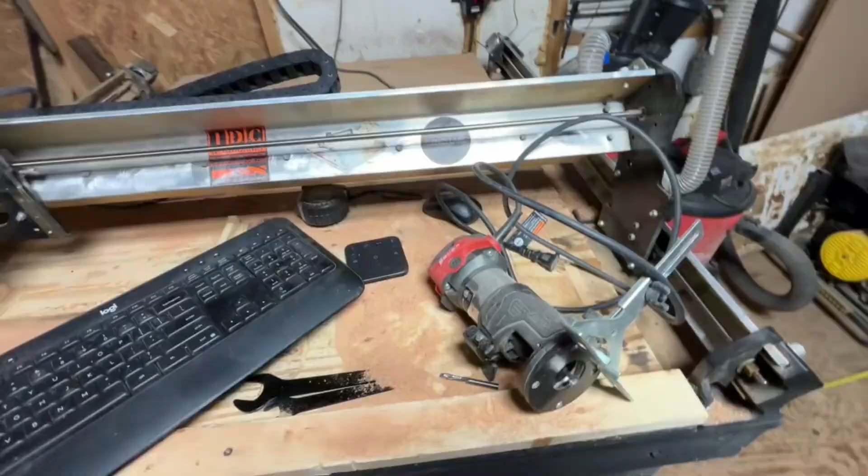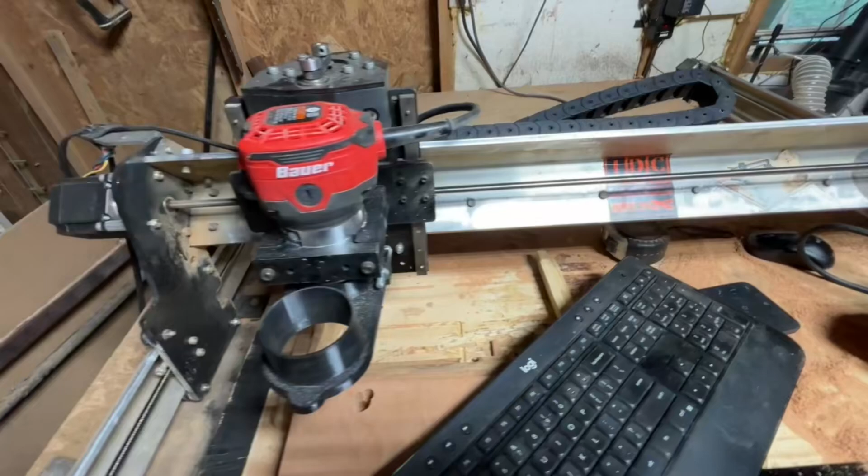Well, we got a mess in the workshop today, but somebody had a question about how to use a keyhole slot in MillMage. I just have this jig set up for mine. I always keep an extra palm router because you never know when one might burn up, but I keep this one on a jig just for keyhole slots. We'll take a look at this, and we'll see how to set this up in MillMage.

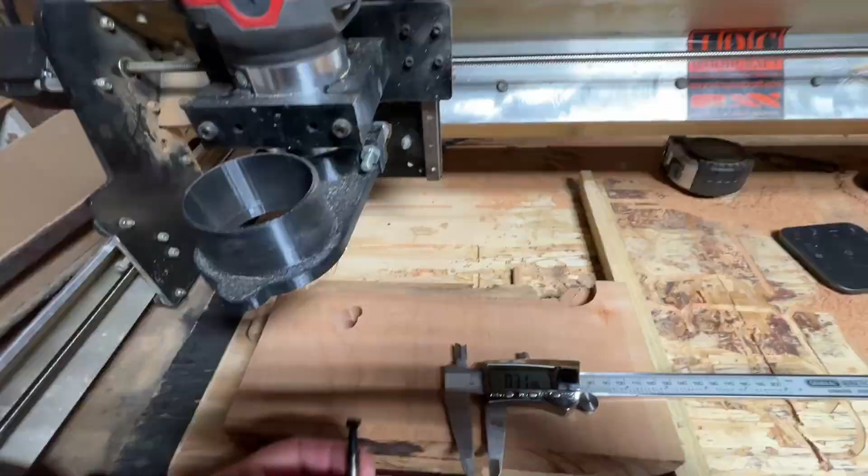Okay, first things first, we need to take a look at our bit. We need to look at the geometry of our bit. You can see I do have a cutting edge on top, so for this bit it is safe to plunge straight down because that's what we're going to want to do.

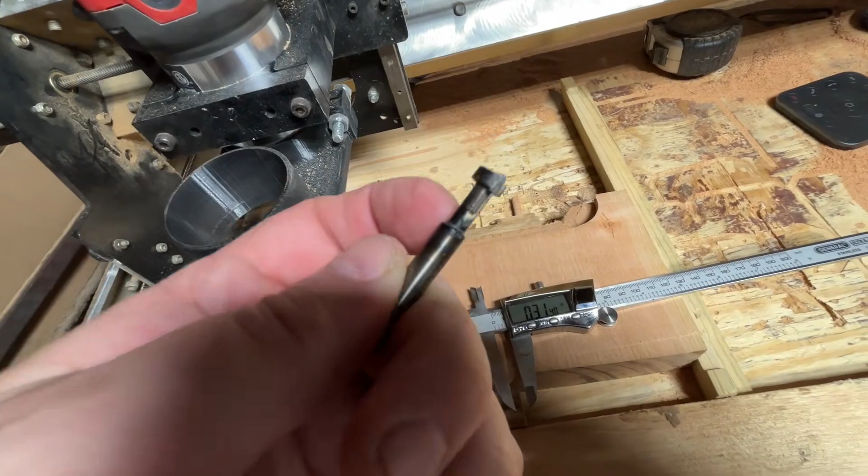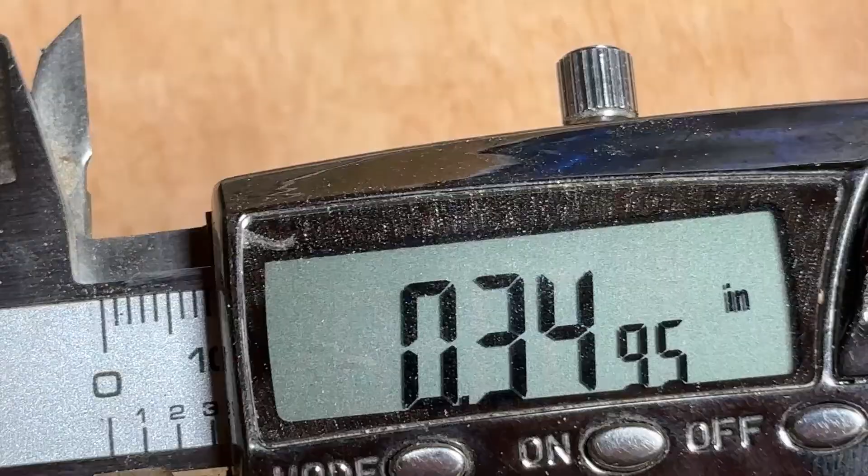And we need to see how long the cutting edge is, how long the flutes are. So I'm just going to measure that with a pair of calipers real quick. I'm going to try to do this one-handed on camera, but I'll verify it off camera because it's hard to see. What I'm measuring is the flat portion on the bottom to the end of the cutting flute up the shank. I'm looking at a 0.35 inch cutting depth.

I did come in a little shallow. If I had this in a clamp, it'd be a whole lot better. I could have put it in my vise. There we go.

You can see we can go up to a 0.36 inch cutting depth. All right, we'll remember that. If you look at this carefully, I think 0.3 inches will be sufficient. I was going to go a 1/4 inch, but that's 0.17 inch just for that portion. So if we go up a little bit to 0.26, anywhere between 0.26 and 0.3 - I wouldn't go any deeper than 0.3, and I wouldn't go any shallower than 0.26 inches on the depth on this thing. But you want a little bit of room in there to hold the head of a screw too, whatever you're going to hang this on when you make this keyhole slot.

Let's look at doing 2 keyhole slots. First thing I'm going to do is click on the pencil tool. I'm going to come up here somewhere near the top - we can move the position later, it doesn't really matter. I'm just going to click one time, and pull the mouse over however long I think it needs to be. We can also change those dimensions here in a bit, but I'm going to hold the shift key to lock it in a 90-degree orientation.

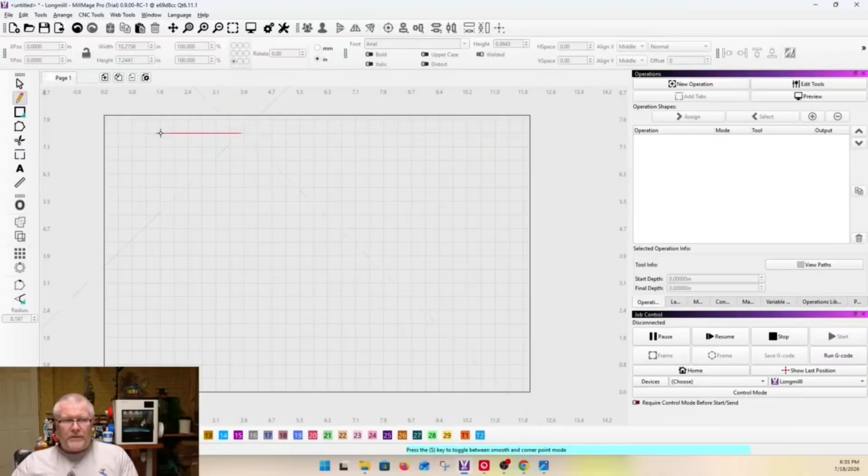I'm going to click again to set another point, and we still got this tail here. I'm going to bring that back, holding the shift key to lock it in place, and click again right where I started from. That's all it's going to take. Now you can see we have a double line here.

I can drag it around, put it wherever I need it. This particular line is almost 2 1/4 inches - let's make it 2.25 inches. And if you wanted to, all you had to do is hit Control and D, hold your shift, and drag it over.

They don't have to be precisely placed because they are long enough that you can slide the piece back and forth across the nails to get them, but you want it very close.

One thing you could do is draw a rectangle and align that to the left edge, drag it out to where it meets the start point of your keyhole slot.

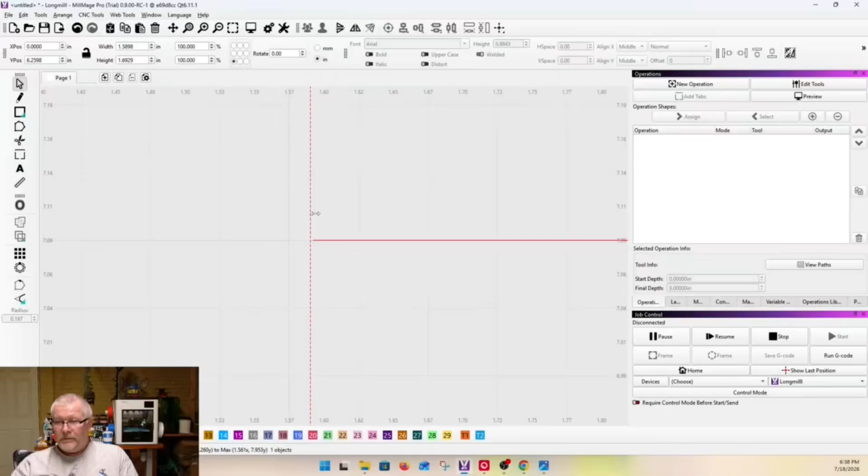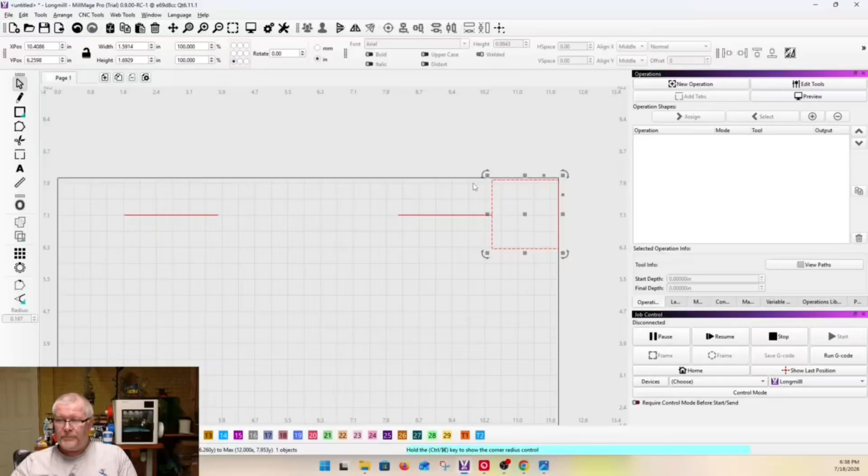Once you have it from the edge of your material to the edge of the keyhole slot, all you have to do is align it to the right side. Grab your keyhole vector, hold shift, and drag it to butt it against your rectangle shape. Then get rid of that rectangle. Now they are perfectly placed.

Now that is how you do 2 keyhole slots. Now, for the toolpath for these, with both selected, we're going to create a new operation. I'm going to do a profile cut.

We want this final depth to be anywhere between 0.26 and 0.3 inches deep. I'm just going to do 0.27, and we want it done in one pass, so 0.27 on the entry type. We do not want a zigzag, I want a plunge. The ramp angle I want to be 0, and we're going to stay along the line, and we'll do 80 inches a minute.

I want to do a 30 ramp. It's not ramping anyway, but spindle speed doesn't matter—I don't have a spindle, but it'd probably be around 13 to 19,000. For plunge, I'll do 30. I'm going to hit OK.

I'm going to make sure that is assigned to these two. But when we hit preview, you're going to notice we don't see anything—we're going to get an error message that there are no shapes assigned to the operations set to be output.

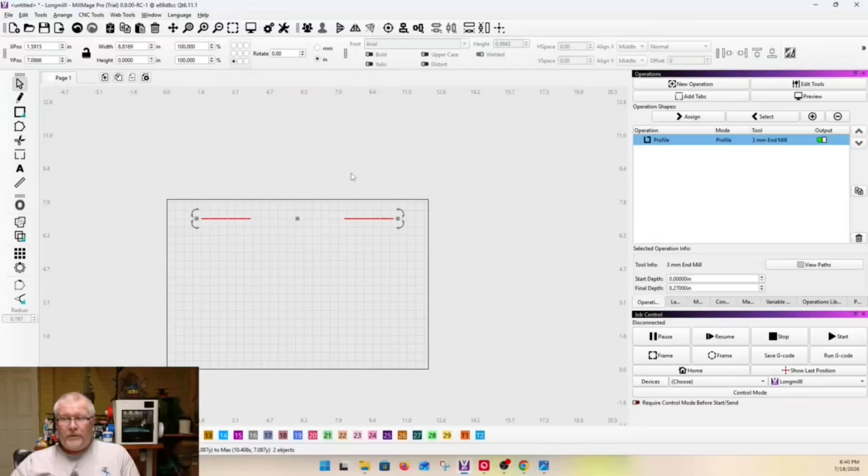We're not entirely sure why we get that, but there is a workaround. I'm just going to click this square right here and draw a square inside of my material.

And with that square, did it do anything? No, it didn't. Let's perform a new operation on this square—new operation, pocket. It really doesn't matter what type.

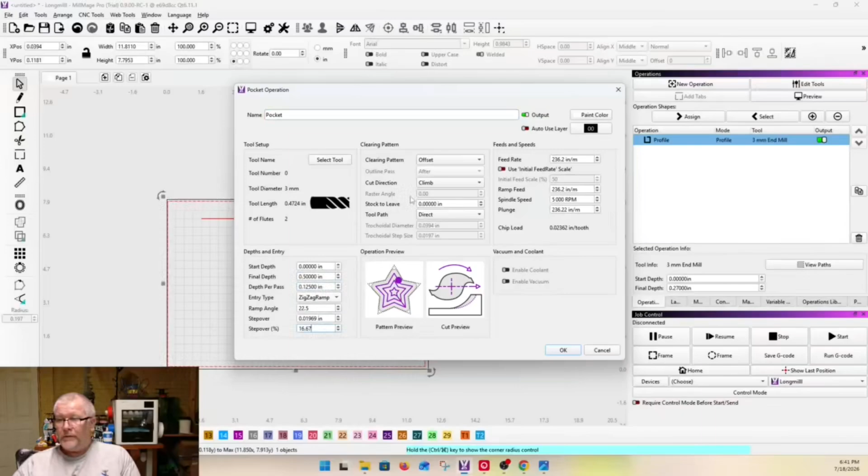I'm going to do a half inch deep, an eighth inch per pass, and hit OK. Now you see we have a pocket operation.

So if I do a preview, you can see it cut out my keyhole, but then it cut the pocket out, so my keyhole's gone.

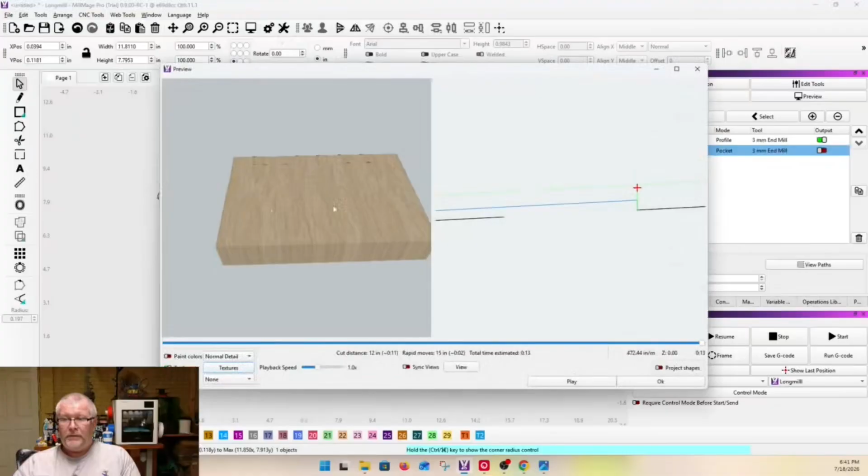So what I'm going to do is take that last pocket I made and turn that off—we're not going to output that. So when I hit preview, there's my 2 keyhole slots.

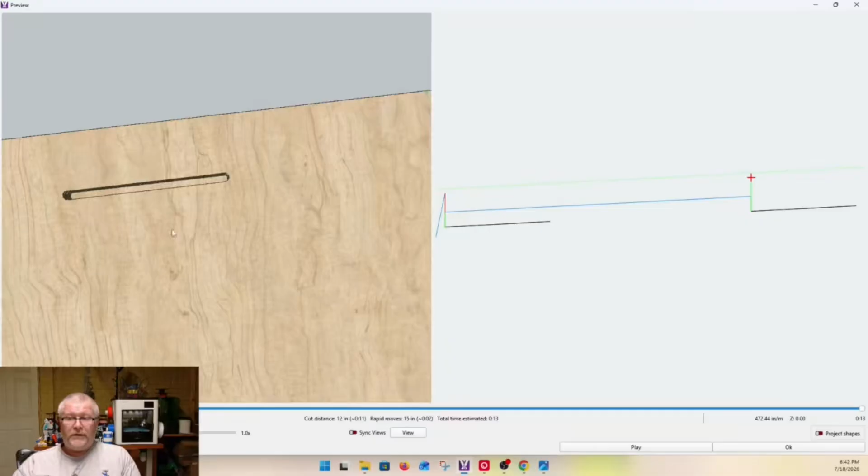All right, we can save that and send it to the router, and that's how we'll have our keyholes. This was just a little piece of scrap wood I've been practicing on, and there's keyhole slots down in MillMage.

There's no keyhole slot operation in MillMage—just use a double vector and assign it using a standard 3 mm end mill profile, but load your keyhole slot bit in there. Thank you for watching.